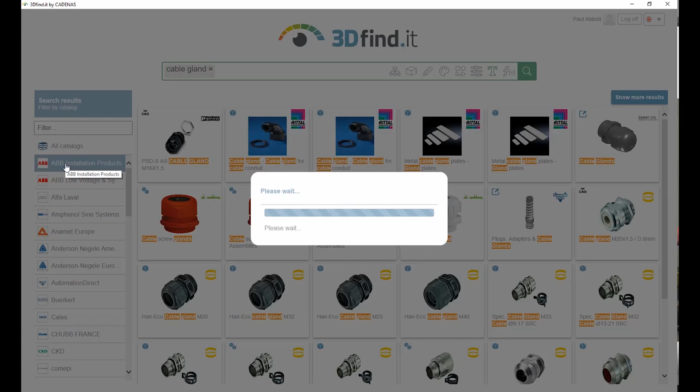Searches can be performed using classifications, geometry, filters, sketches, and much more. Here we are searching for a 30mm cable gland using text alone. We can narrow down the search by filtering different suppliers, or even add an additional search term to look at a particular standard. We can visualize the 3D model for the part, or even the 2D drawing.

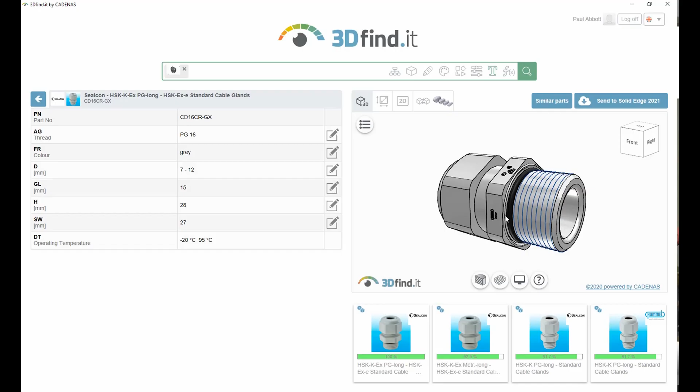Individual parameters for the part can be defined. The 3D models can be sectioned, and users can even search for similarly shaped parts. Parts may also be compared. A compare function graphically illustrates the difference between the last two parts found.

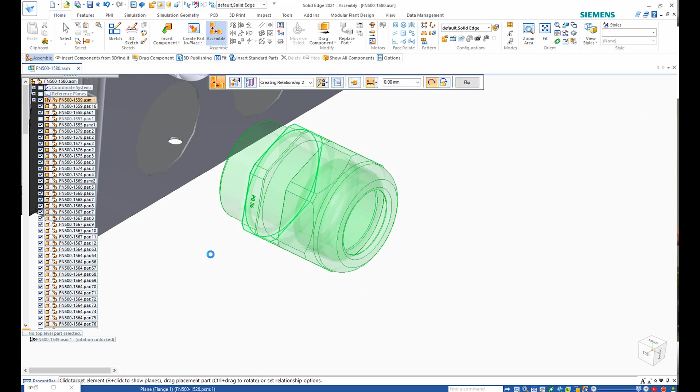This allows users to ensure they have exactly the part they need or to choose another part to compare if necessary. Once the desired part is located, a single click adds it to a Solid Edge assembly, allowing us to assemble it where required. Next, we need a blanking grommet.

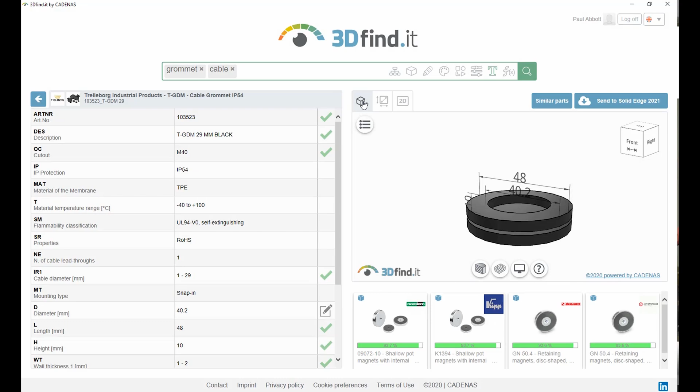This can be selected and placed in the same way. We launch 3D Find It, run a text search, find the part we need, and define the appropriate parameters. In this case, the diameter. Once we have visualized the part, we can add it to our assembly and define the appropriate relationships.

The next cable gland needs to clamp a 3mm cable. In order to find an appropriate matching gland, 3D Find It allows us to use an existing 3D model to perform a shape search. In this instance, once the appropriate file is selected, the size-dependent slider allows the search scope to be defined before running the search.

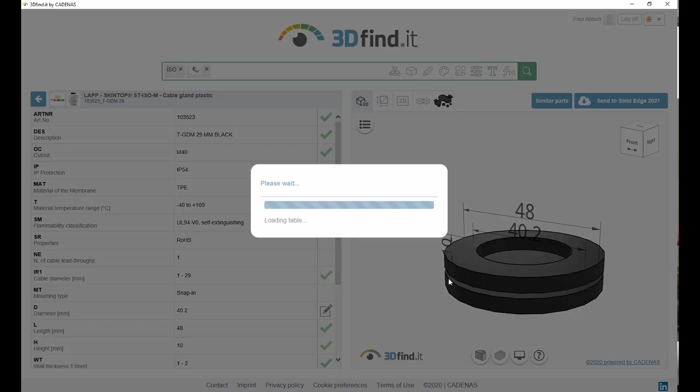We could also narrow the search down by adding other search terms. Once the desired part has been found, the parameters can be defined and the part added to our assembly. Relationships are added in the normal way.

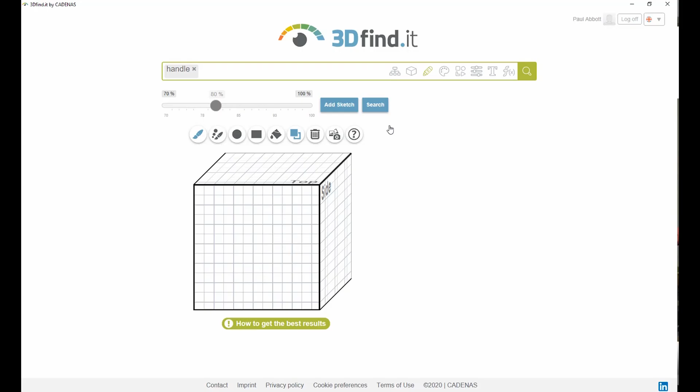We now need to find a handle for the top of the case. Going back to 3D Find It, we'll do an initial search for the text term handle. This returns many results, so we need to narrow this down by providing a sketch and simply drawing the shape of the handle we need. Once we have located the appropriate handle, we can define its parameters and add it to our assembly.

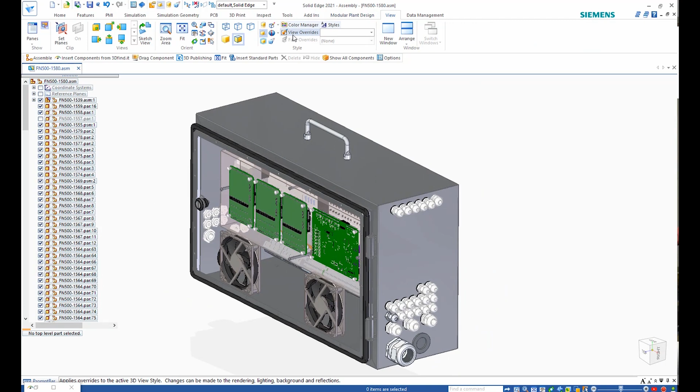The CADENAS 3DFind.it search engine provides access to millions of 3D CAD models in native Solid Edge formats from more than 800 manufacturers, increasing your efficiency in finding the parts you need for your design.